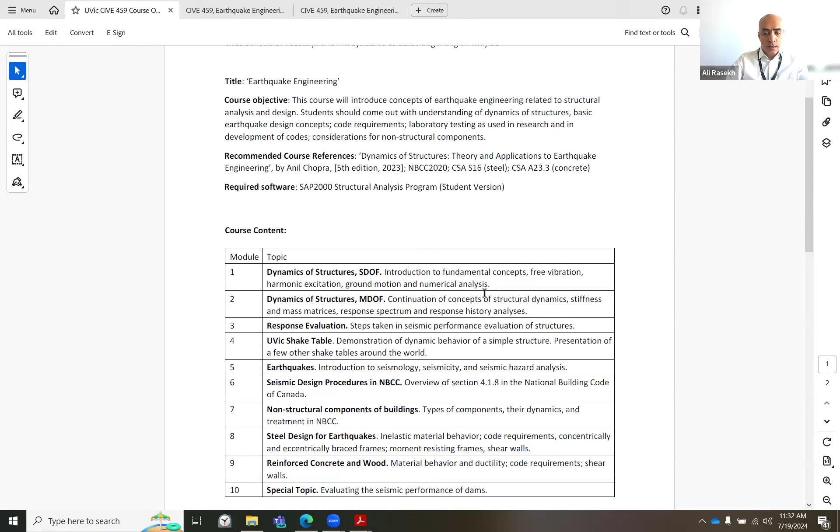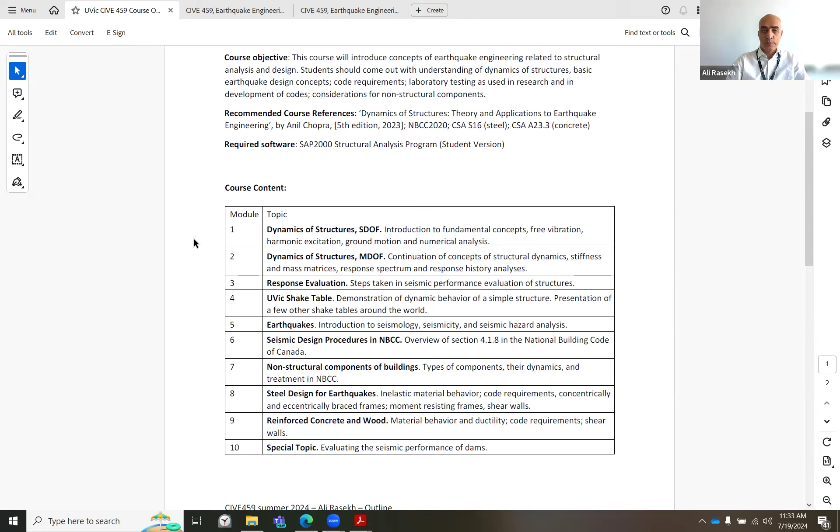And then I will have a quick session about concrete and wood. This course is already like a graduate course, it has so much content, so thanks for your patience. It will be fruitful, you will benefit from listening to all sorts of things or just gathering the documents and documenting for yourself. If you work as a structural earthquake engineer, that material will help you in your work. So thanks for attending the class, and the report writing and quizzes, etc.

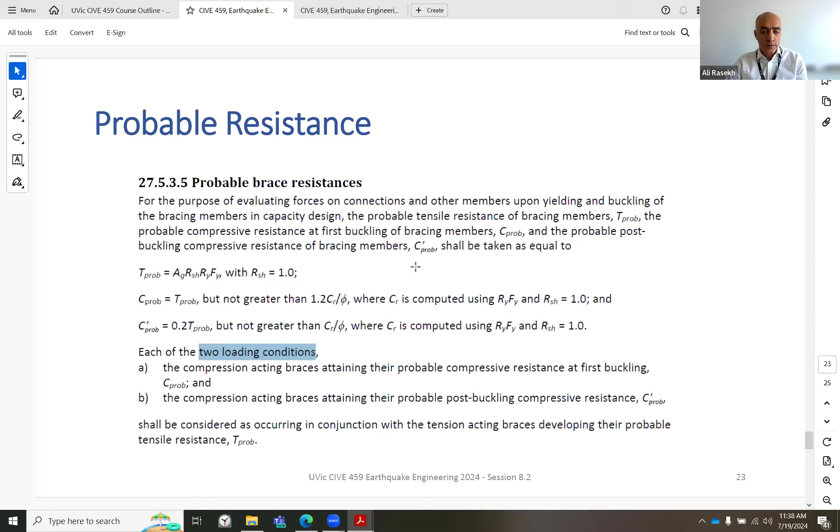Okay, thank you, I think there's no more questions. Let's see what we can do about steel. I think we finished this, that's what I remember, but I still opened it to see if there's anything I want to re-emphasize.

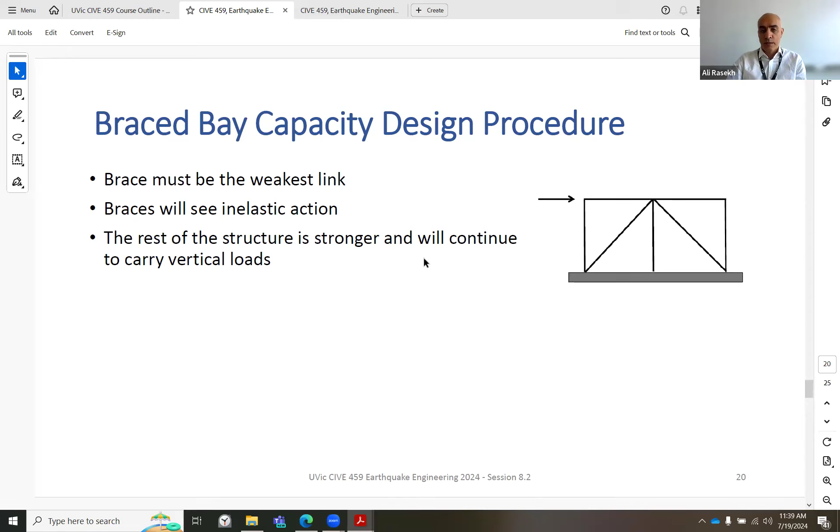No, it's mostly the procedure for steel. Even to me, sometimes I think that doesn't exactly go with your engineering judgment. But if you think carefully, you will see that we are protecting some members while allowing some other members to become ductile. This procedure is designed to have some members yield and provide ductility, while every other member does not yield.

With capacity protection, we are confident that the weak link in this system is your bracing. So the bracing is the weak link, and the demand is high. Therefore the bracing will keep on yielding, and the deformations will be higher than what you planned or designed for. But the vertical load carrying system will still remain intact because you've done capacity protection. Everything else is stronger than the bracing, the weak link in your chain.

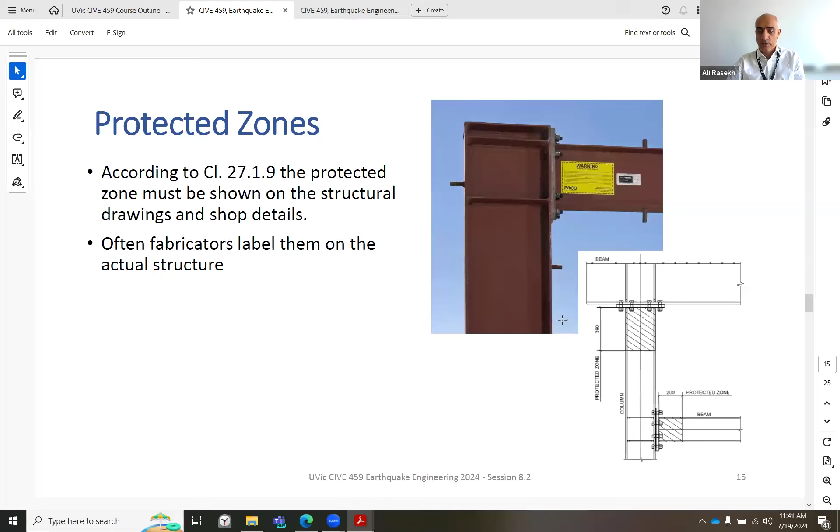I don't know if I showed that chain one more time. I have shown you that chain in previous presentations. You can think about your load path as a chain: the load starts here, goes through the beam and connection. Don't forget, the connection is part of the load path, then to the bracing, more connections, and the foundation.

Going through this procedure, you've made sure that the weak link, the member that fails, is the bracing. Therefore, when an earthquake happens that is unusually high, more than the design, more than what the code provided or what scientists and geologists expected, still your braces are yielding and everything else remains intact, which is very important in our philosophy of design.

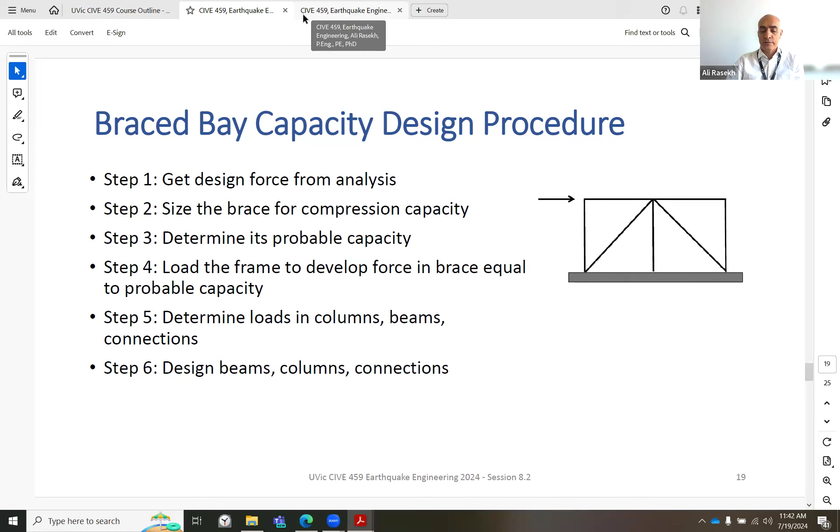It takes time for this to settle, but you will appreciate it when you practice it, maybe do some exercises. You will appreciate its concept, especially thinking about earthquakes greater than what you designed for, and the fact that the structure won't really collapse in a brittle way after that earthquake. You will appreciate this ingenious, smart solution provided for earthquake structural engineers.

Now let's see if we can go through this example, same scenario but with some numbers. We have a brace system, again concentric, meeting at the same location, with no shear zone in between. The base shear was calculated to be 135 kilonewtons.

This number is already reduced, based on a ductility reduction factor of 3 and an overstrength reduction factor of 1.3, which multiplied together is about 4 times lower than what you see from the spectral acceleration. So that procedure has been done and the reduction applied, and you are designing for 135 kilonewtons. The shear load already includes accidental torsion, so don't worry about that part.

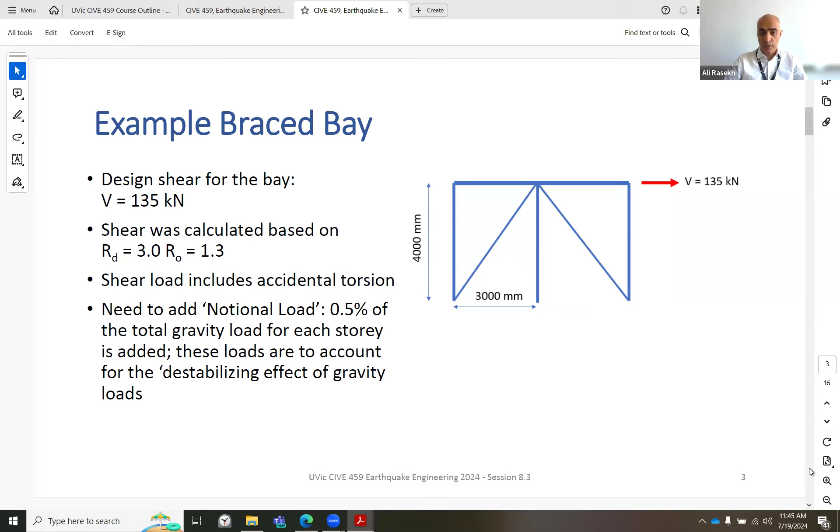So this is added. For this example, gravity on the bay is 1,000 kilonewtons, hence notional load is 0.5%, which is 5. You add that effect to your seismic load as well: 135 plus 5 is 140.

For the capacity design, use the capacity design forces from the yielding elements and do not include the notional load. So that's the procedure.

Okay, we did this calculation. We applied the 140, exactly 140, which is the demand. Then we calculated, using SAP 2000 model or hand calculation based on this equation here, you get a load of 116 in the bracing. This bracing is in tension, and this one is in compression when the load is in this direction.

However, we know that an earthquake could happen in both directions, so we should always keep in mind that the load goes in both directions. This is a symmetric system, so we can continue just knowing that everything will mirror out.

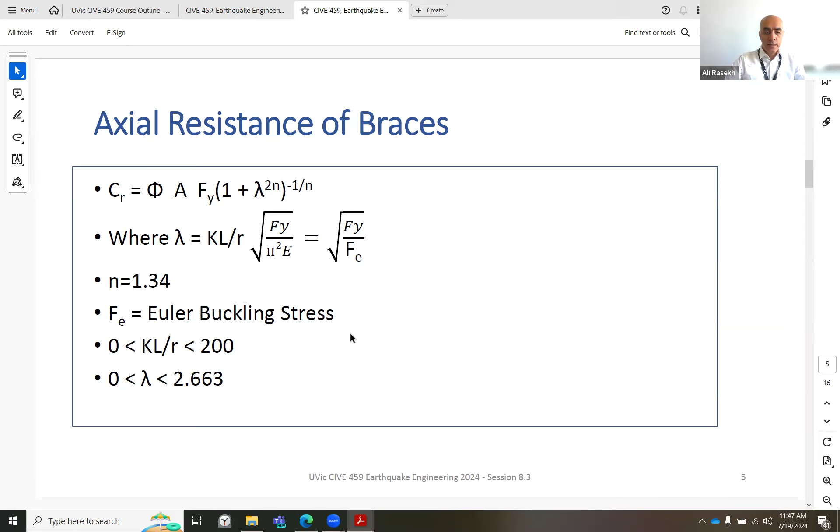We calculate the axial resistance of the braces by going through the procedure for the buckling load in compression—the Euler buckling load or post-Euler buckling stress. Basically, we can then size the members.

So brace load was 116 kilonewtons, length was 5,000 millimeters, with components of 3,000 and 4,000. The total length would be 5,000 millimeters.

So we have the length, and we use K equal to 1 because it's pinned on the two sides. Most braces are pinned, except in special conditions, but we normally think about a brace as pinned. There are two reasons for this.

Okay, yeah, not very important, sorry.

There are two reasons we think braces are pinned. One is that the connection is pinned. The other is that the braces are normally so weak in bending that they cannot really take bending. So even if the connection appears strong, the bracing cannot take bending, so practically it acts like a pin, and therefore K equal to 1 is a good assumption.

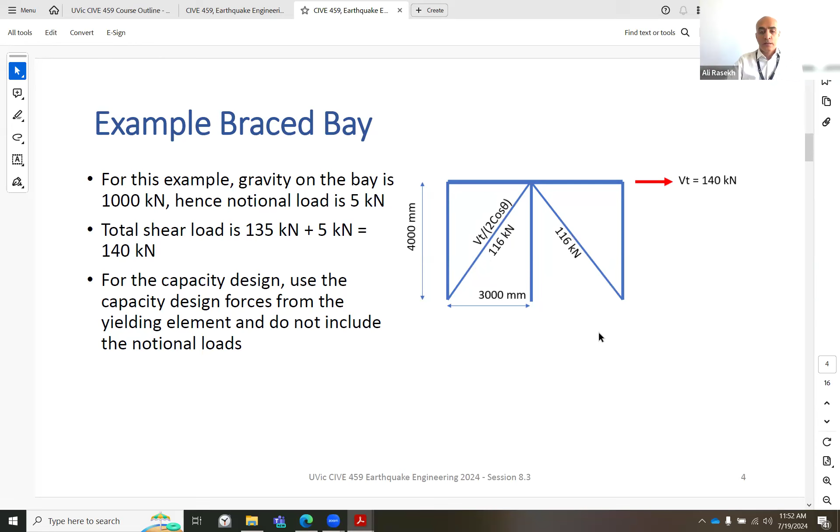Otherwise, if you want to go by the book, we should prescriptively design both of them for tension and compression, but we know that they are going to be weaker in compression. So that's why we only did compression. That was the only reason. You checked it for tension and it would be a pass.

Now that we have sized the bracing, the ductile part of the system, let's find out about their probable capacities.

First, find the resistance of the members in tension. So axial tension, how is it to calculate? You don't necessarily need to use the tables. It's phi times cross area times Fy, and for HSS 102 by 102 by 3.2, the tension capacity is calculated to be 387 kilonewtons. That's, as we rightfully expected, much greater than the compression capacity.

So tension capacity is 387 kilonewton, but the other brace would be buckling in compression before then. And then this load reverses, so both of them should be designed similarly.

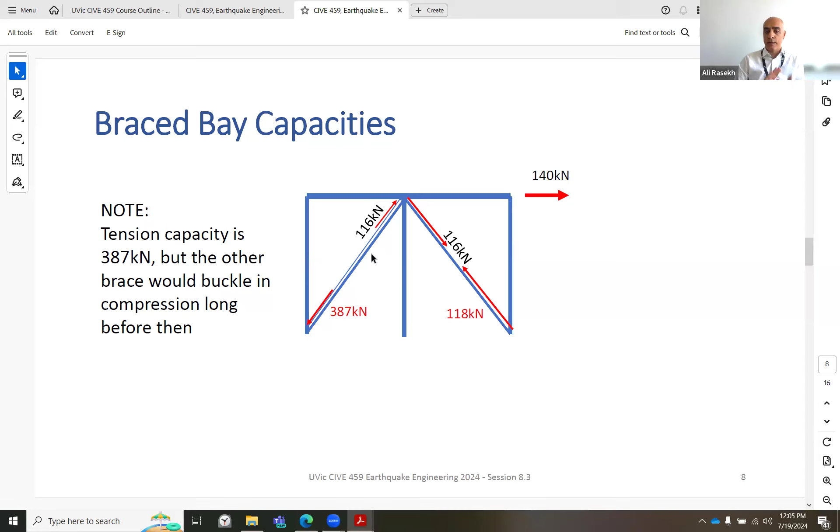when we put a ceiling, that's a ceiling for everything. However, just want to reiterate this issue that for lateral force resisting members, we use the 140, which was out of your SAP 2000 program. And in a way, that chapter of design is finished. So we don't think about it anymore. So those members who are in charge of carrying lateral loads, they are designed and they are finished. And we are within the step where we are capacity protecting everything else.

And yeah, so you said that maybe your question is that when we use the other member, the tension capacity also increases. Like the area is larger, therefore the tension capacity is larger than this TR that we are seeing here. And based on a structural engineering mindset, it's a pass because the capacity is more than demand. So we say it's pass.

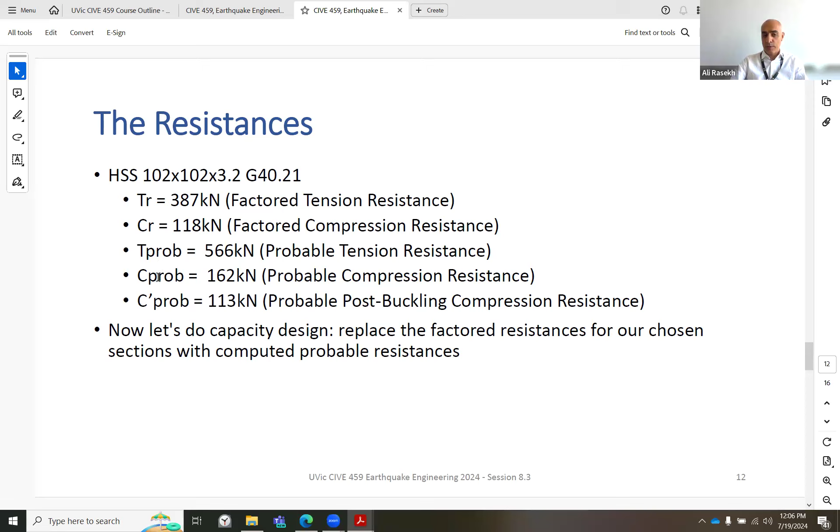However, but the effect it has on the design of everything else is that the tension capacity would be larger with that other profile. The capacity would be larger with the other profile, but we don't mind generally. But then the probable tension and probable compression capacities go larger. And when we want to back calculate these values that are applied to capacity protected members, they are large and they make capacity protected members enormous.

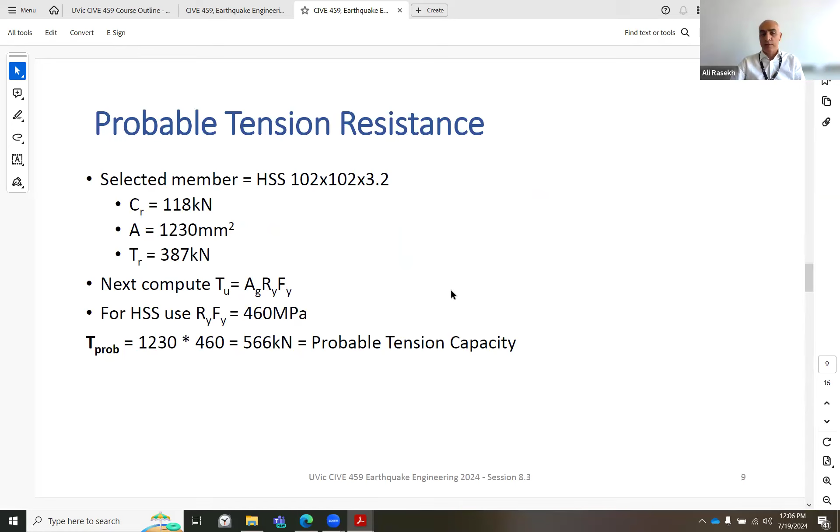So if I am that, yeah, if I understood correctly, yeah, you were asking if the tension capacity increases, yeah, the larger profile will have larger tension capacity. Did I answer your question?

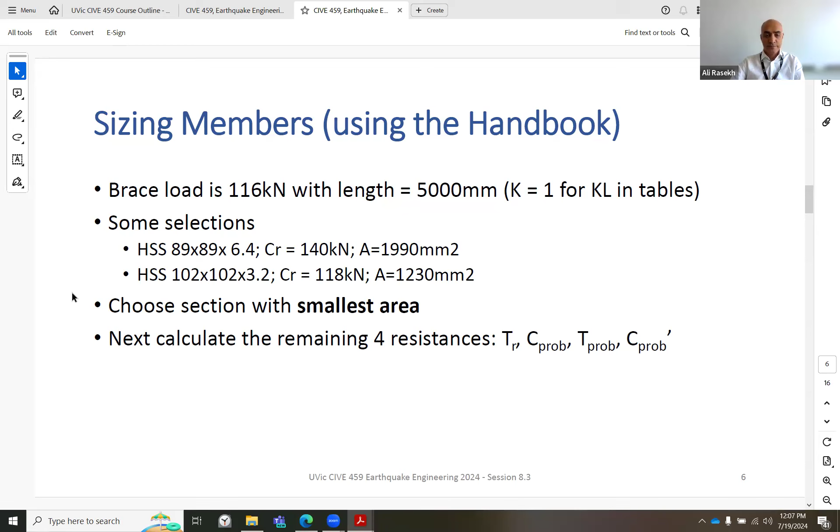Okay, yeah, sure. So don't expect too much from yourself or me. This procedure is confusing to everyone, including me, but I think carefully, it's very smart. So I'm happy with it, though I might confuse myself explaining it. It's a good procedure, I guarantee that.

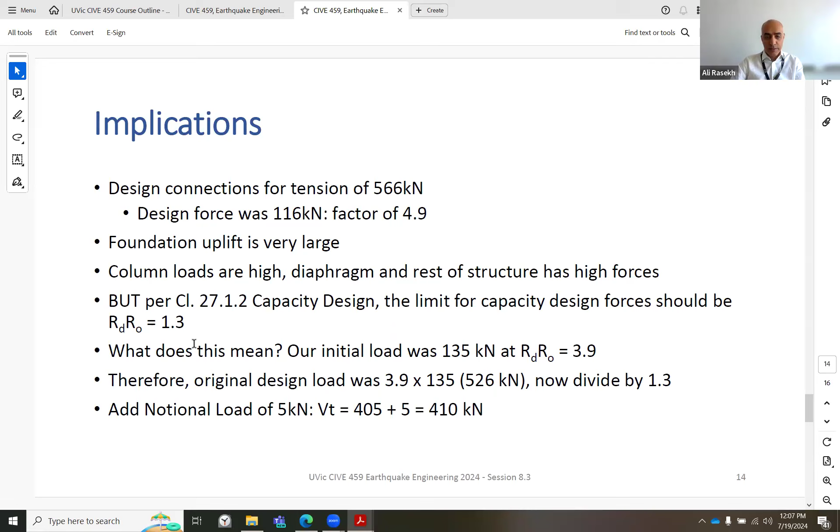So we said there is a ceiling to the value for capacity protection. For capacity design forces, assume the compression brace is at the probable post-buckling resistance, but distribute the rest to the tension brace. VT slightly increased, but the probable tension is almost the same after all. So that's summarizing what we were talking about, and there is a capacity of 570 and 113 in compression after all.

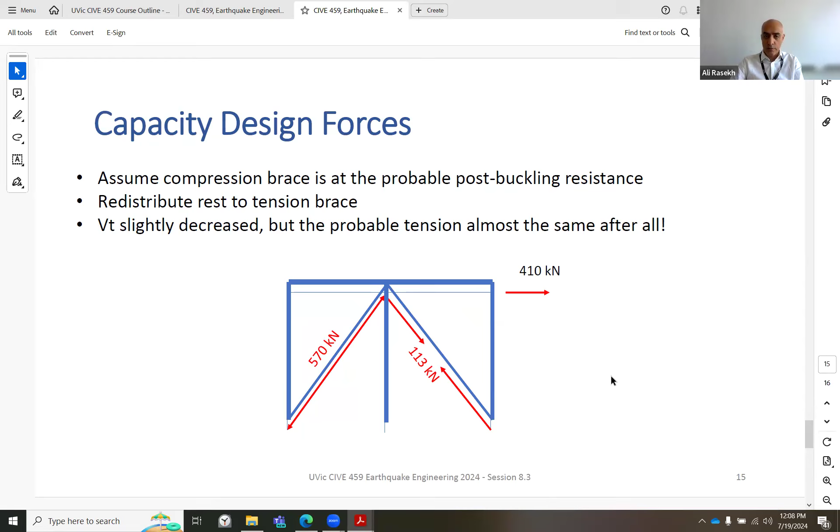Any questions on this slideshow? I highly recommend that even if you didn't do it for the rest of the course, for this particular slideshow, go through it a few iterations, even criticize it, until you fully understand this procedure, because I like it—it's a nice procedure and generally designed in a smart way.

Let me see if I can start the next slideshow.

So there were quite a few examples, but I'll call this the next example. We have this in SAP 2000. Didn't we have a 2D model as well? Yeah, this is 2D, but that's pushover—reiterating pushover, so we'll go through that one as well. Then the steel section will be finished, but part of that I'll be doing in the recording I create next Tuesday. You're welcome to attend; I'll go online and everything will be the same, except it's not mandatory since it wasn't in your original schedule, so maybe you've planned something else—that's fine. The recording will be there.

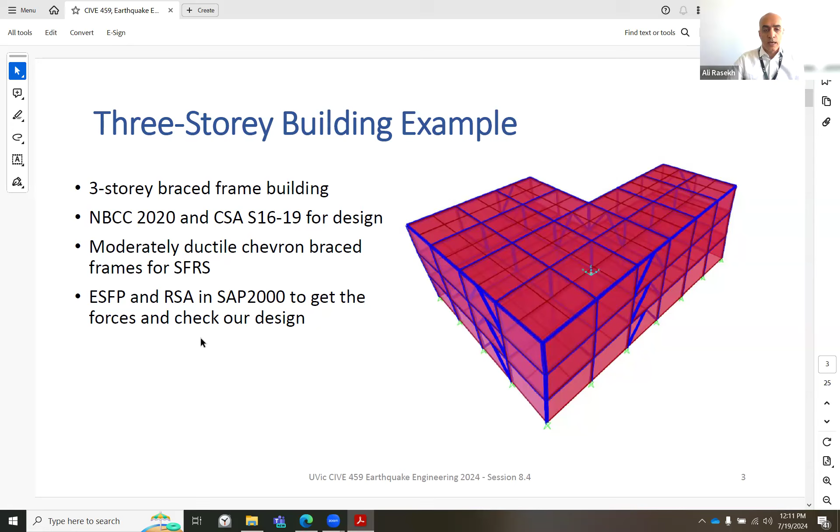So let's continue 10 minutes—I'll just explain the situation here. We try to make this one more real. This is a 3-story braced frame building designed based on the National Building Code of Canada 2020 and Canadian Standard Association S16 for steel design. This is a moderately ductile chevron braced frame for seismic force resisting systems—basically concentric bracing. The equivalent static force procedure and response spectrum analysis in SAP 2000 are used to get the forces and check the design. You're familiar with both procedures.

Modeling mass: it's key to correctly model the seismic weight to get correct base shears, especially for RSA, since dynamic analysis depends on the masses. Add the mass to the model in the horizontal direction so it's not confused with the weight—horizontal direction is very important. In vertical direction, be careful not to add to the weight of your structure by adding mass there.

Add either joint, line, or area mass, depending on your program and the level of accuracy you want, or add dummy elements with no stiffness and only mass, similar to the concept of cladding. I know people these days want a more sophisticated way, but I'd be happy just adding it as nodal masses.

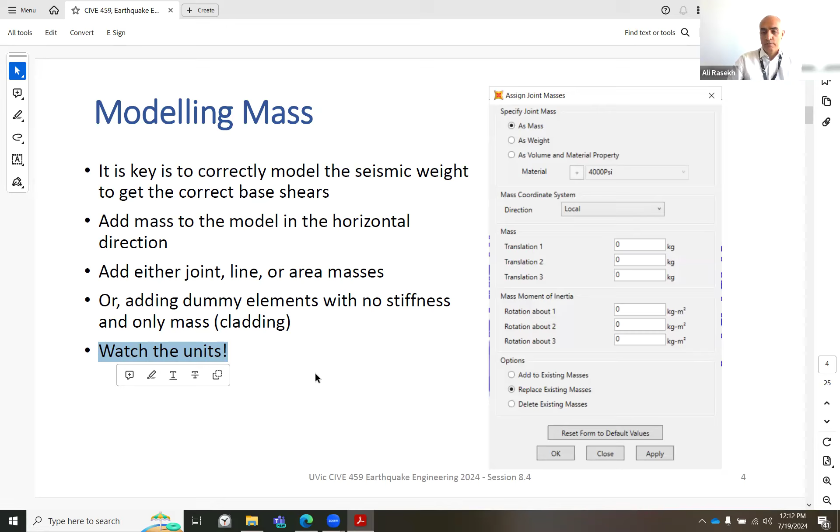Units are always key—use correct and uniform units, whether kilograms or meters, etc. In the industry, even in Canada, there's use of inches, feet, pound force, and the unit of mass in the US or imperial system. It's even more confusing, so be careful with those values. Units are the number one source of error in a lot of analysis.

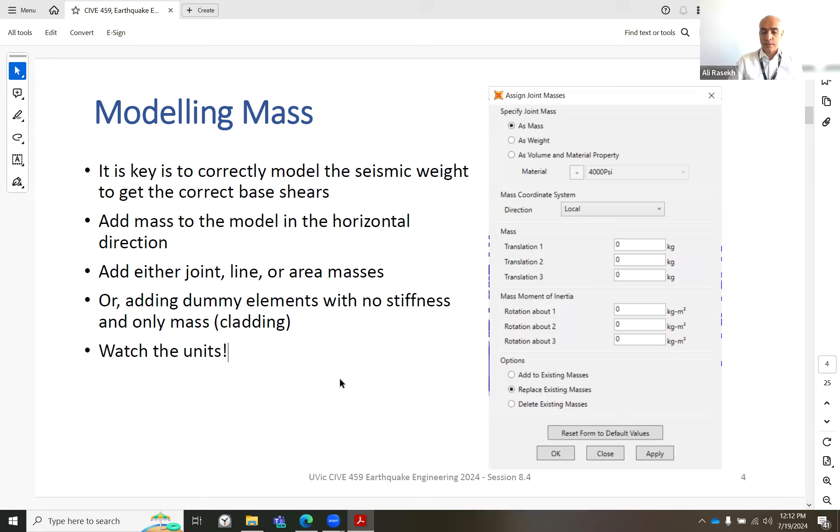Analysis model: the SAP 2000 model is initially comprised of W310 by 39 beams—I'll share the model with you if I haven't already. Those are the beams and columns: W310 by 39, and HSS 203 by 203 by 6.4 is used for bracing.

For simplicity, in the SAP 2000 model, we assume a 150 millimeter concrete slab for the floor and 25 millimeter for the roof, connecting all points in each level using a diaphragm constraint. In reality there's a little flexibility, especially at the roof since it's thinner, but the model assumes it's a very stiff roofing and floor system, and all nodes move together.

25% of the snow load should be added to the roof per National Building Code of Canada. Using 1.5 kilopascal for snow, and total roof area is 648 square meters, we're adding 243 kilonewtons of snow on the roof.

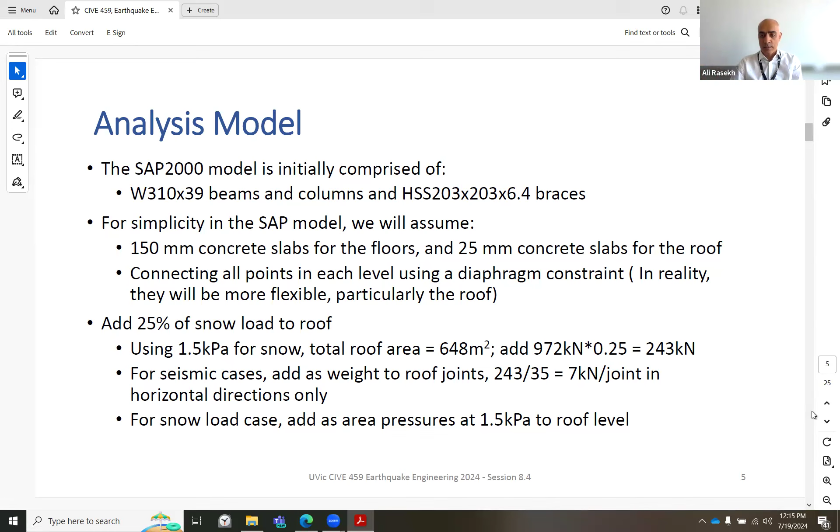For the snow load case, add it as area pressure at 1.5 kilopascal to the level. You do it separately, and when doing it separately, you don't want to do it twice. So you add it as load or pressure, and because at the same time you want to add the mass, in order not to double count it, you add the mass only in the horizontal direction. At least that's the old school way we do it. Maybe more modern programs can handle this issue better.

Analysis model adds 50% of live load and partitions to the first two floors. Therefore, 3.5 kilopascal for live load is added to the model as area pressure on levels 1 and 2. For partitions, use 1 kilopascal, and the value is calculated. For seismic cases, model as horizontal loads, but only need 0.5 kilopascal.

Add this as weight to floor joints. For dead load, model as area pressure and use 1 kilopascal. Similarly for cladding, add 1.5 kilopascal for cladding on the floors.

Floors 1 and 2 include 2 meters below and 2 meters above. You want to account for the walls above and below the floor, with half and half going to that floor. The roof only considers 2 meters below, because obviously there's nothing above it.

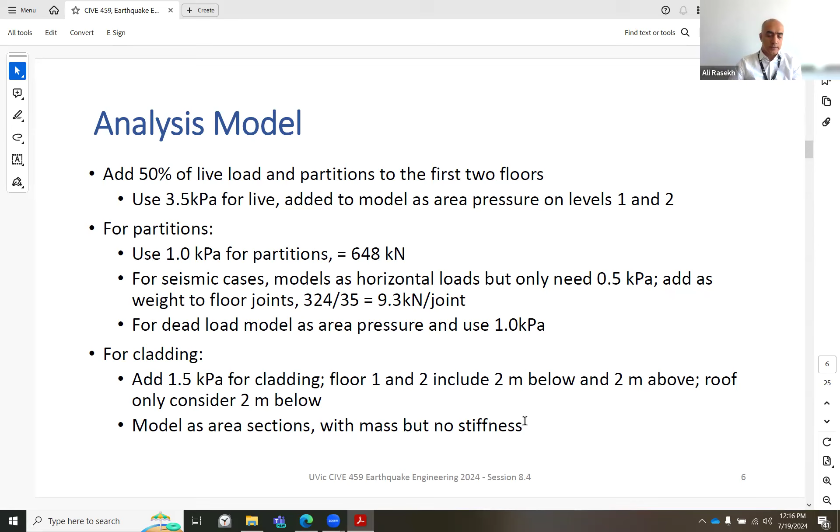The model has area sections with mass but no stiffness. That's the way we included it in the model, but as I said, nodal mass would have been good enough.

Modeling consideration to check seismic weight: first, compute the dead load case before you add additional masses. This is basically a sanity check. You should do sanity checks on your models, double checking the total weight against the reaction you are reading from the model, and make sure you have done it correctly.

Then you add the masses and apply the horizontal static acceleration case scaled to 1. Calculate the base shear, which should match what you calculated by hand. Those are the sanity checks.

Since the requirement from the National Building Code of Canada is that the seismic force resisting system must be designed to carry 100% lateral load, we need to change the frame condition to pins. Otherwise, there will be moment frame action, which will reduce the forces in the frame. So if your design is for bracing to withstand the lateral load, make sure your model is the same, and not a moment resisting system, since you're not intending to design it that way. This should apply to beams and braces.

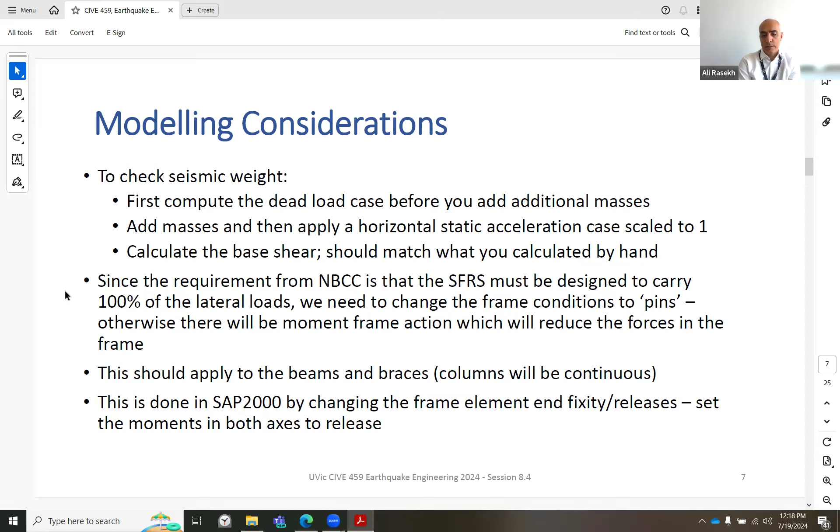Beams and braces get pinned, while columns can remain continuous, and then they won't really attract lateral load. This is done in SAP2000 by changing the frame element fixity release, setting the moment in both axes to release. That's the technicality of how to do it.

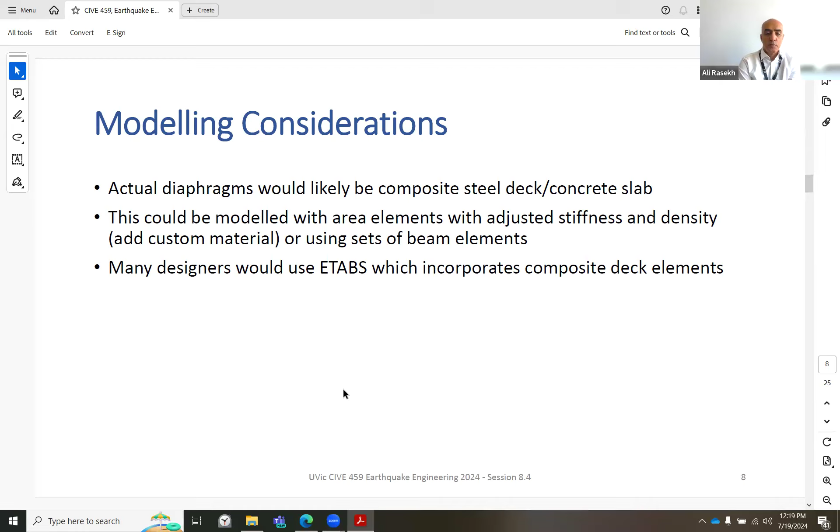Modeling considerations: actual diaphragms would likely be composite steel deck concrete slab. This could be modeled with area elements with adjusted stiffness and density, or using sets of beam elements. Many designers would use ETABS, which incorporates composite deck elements. I have almost zero experience with ETABS, but probably you guys know better.